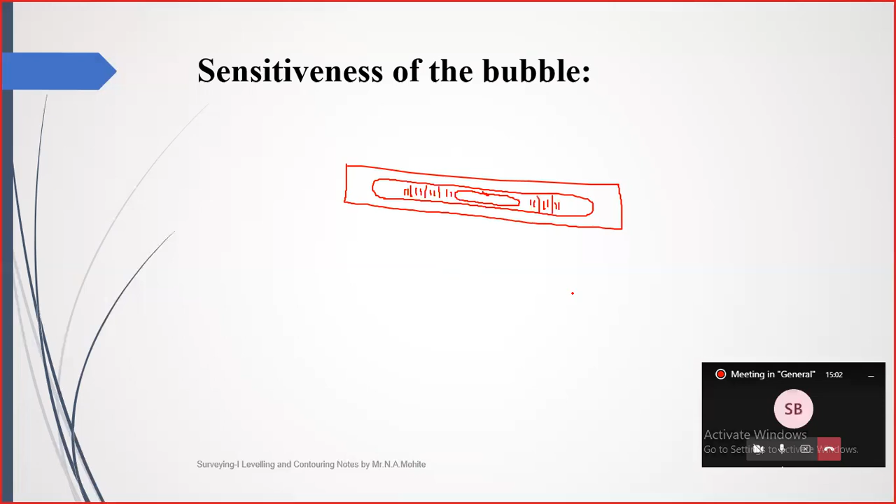So unless and until the bubble is at the center, we can't move further. But suppose there is a certain deviation, it is touching this one division, so there will be a change in the staff reading. So that is dealing with the sensitiveness of the bubble tube.

So in general, the concept of sensitiveness is related with the deviation of the bubble caused by the movement of this bubble per division. So you can call it the term sensitiveness in the context of a bubble. It is the effect caused by the deviation of the bubble per division of the graduation of the bubble tube.

So we are going to check correspondingly what is the change in the staff reading, and according to that we calculate a certain relation of this bubble tube, because the bubble is present inside this bubble tube in a curved manner. So this is the box which is fixed, this is the bottom part, and in which this is the bubble which is fixed.

So we are going to check whenever there is a change in the position of the bubble. So in general we can call the sensitiveness of bubble tube the effect caused by the deviation of the bubble per division of the graduation of the bubble tube.

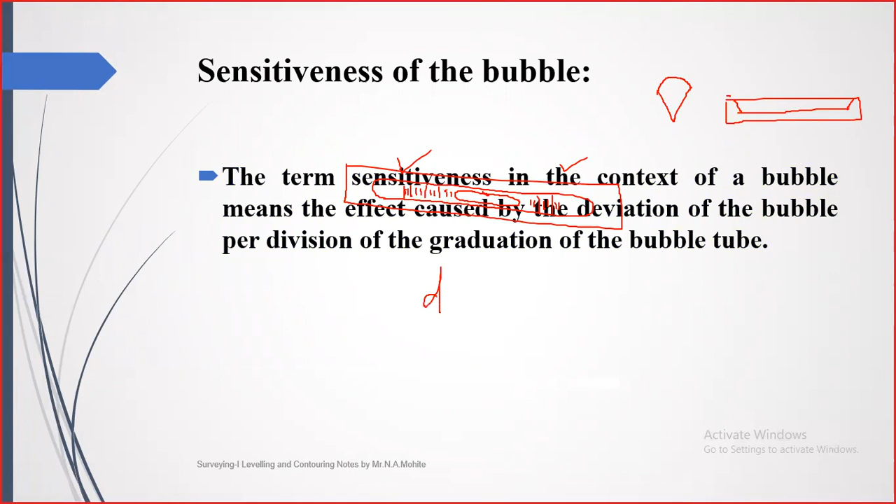N is nothing but the number of divisions by which the bubble has been moved. When it touches the first division, N is equal to 1. When it touches the second, N is equal to 2. And small d is nothing but the distance between these two graduations, which is 2 mm. We'll get it clear when we solve the equation. This d is sometimes denoted as small l also, that is the length of one division of the bubble tube, which is 2 mm.

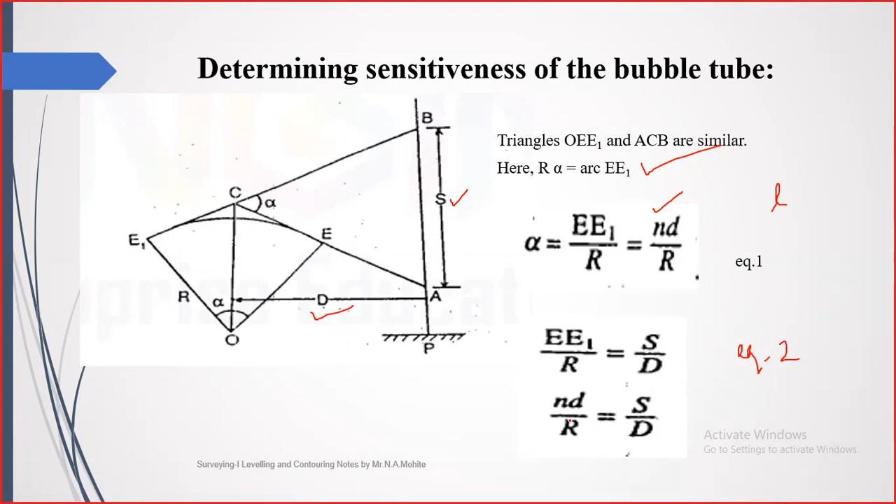Now I'm going to make the comparison. EE1 upon R is also equal to S upon D, by making use of the similar triangle property. So I'm going to equate equation number 1 and equation number 2, so that I can get the value of R, because the sensitiveness of the bubble tube is measured in terms of radius of curvature and angle of curvature, that is R and alpha. If I want the equation in terms of R, I transfer R to the right hand side, S to the bottom and D to the top.

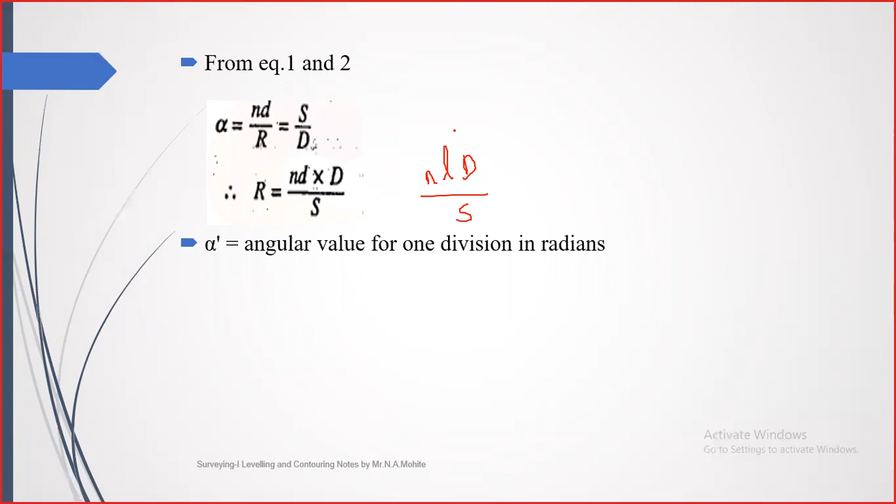So from equations 1 and 2, the equation becomes R = NdD upon S, or it might also be NlD upon S. And alpha is correspondingly transferred. Here R is the radius of curvature, measured in meters. N is the number of divisions by which the bubble has been moved. l is the length of one division, that is 2 mm, the distance between two divisions. D is the distance between the instrument and the staff, and S is the staff intercept. It can be written in this manner also.

This is the equation for R, the radius of curvature, but we are also interested in finding the alpha value, the angle of curvature. Correspondingly, we have the equation Nd upon R equals S upon D. So we equate it: S upon D into 1 upon N. We want the angle of curvature when the bubble is moved by one division, so we divide by N. This value comes out in radians.

If we want it in seconds, it is multiplied by 206265 seconds, since 1 radian corresponds to 206265 seconds. So this is the equation for the angle of curvature: alpha dash equals S upon ND into 206265 seconds, and this is the equation for the radius of curvature: R equals NlD upon S or NdD upon S.

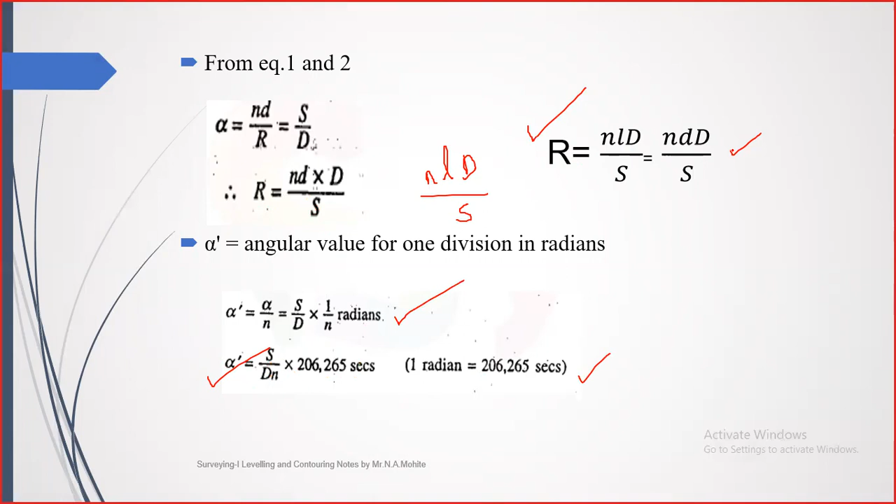Now take an example: I am standing with my instrument, the dumpy level, at position O, and this is point P at a distance of 30 meters. I am going to bisect the staff when the bubble is at the center, and take the staff readings when the bubble is moved by one division, two divisions, three divisions. That is the practical we are going to conduct, so we'll get it clear.

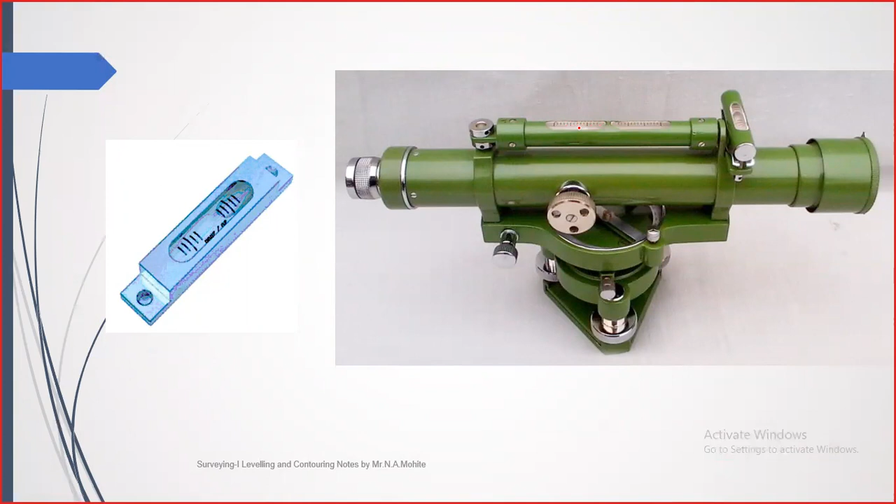This is the sketch of the longitudinal bubble tube. These are the graduations, you can see them here, and this is the bubble inside, mounted over the dumpy level. Likewise here you can see the bubble tube in an actual photo; this is a pictorial image. The graduations are there and the bubble is present here. We are going to determine the sensitiveness of the bubble tube according to that.

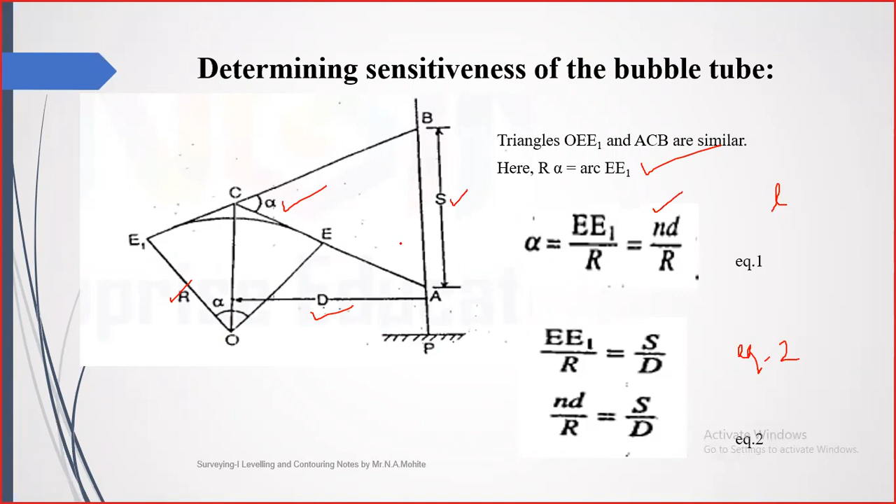So O is the instrument station, P is the staff station, distance is 30 meter. When the bubble is at the center, we are going to take that staff reading and enter it here. Then, as I told you, we are going to move the bubble by single division. When the bubble has been moved by one division, I'm going to write down that reading here. Then when the bubble has been moved by two divisions total, I'm going to write it here.

And when it is moved by three divisions in total, that is, in addition to the first two divisions one more, I'm going to write down the staff reading in this third row. The difference between the staff reading when the bubble was at the center and the staff reading when the bubble was moved by n divisions, I'm going to calculate and write here. That will be S1, the staff intercept S.

Correspondingly, the difference between when the bubble is at the center and when the bubble has been moved by n divisions, n equal to 2, whatever the difference is, I'm going to write it here. That is nothing but S2. And likewise for the S3 staff intercept.

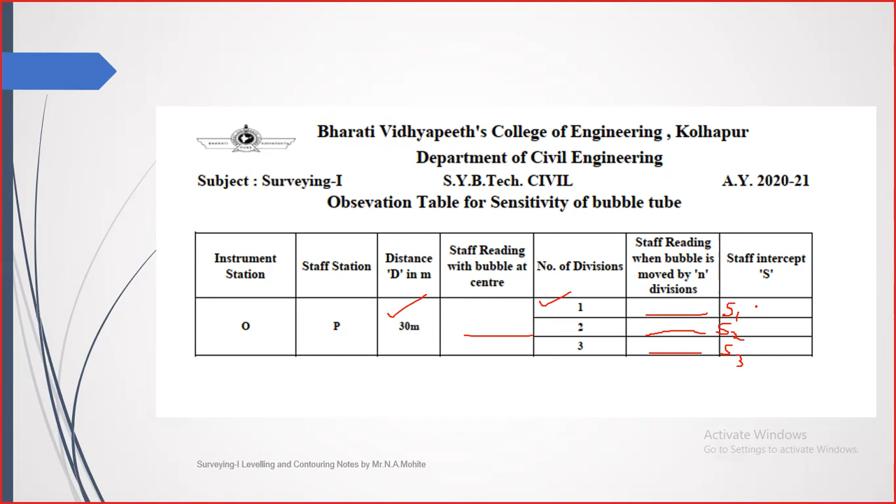So now, as per the formula, you have the distance D, n, and the staff intercept. You are just going to calculate three values of radius of curvature, R1, R2, R3, and angle of curvature alpha 1, alpha 2, and alpha 3. Then you calculate the average, which gives the radius of curvature and angle of curvature, that is nothing but the sensitivity of the bubble tube.

I will show you how the movement of the bubble is taken. When the bubble is at the center, I am going to take down the reading. This is the first case. Initially it was at the center, so I'm going to move it by one division and touch the first division. That is n equal to 1. Likewise I'm going to move it.

So what does n equal to 2 mean? It is going to touch this division, this graduation on the bubble tube. So this is n equal to 1, this is n equal to 2. The bubble has been moved by 2, in addition to the first only 1 more, so total 2 divisions. And lastly, I am going to move it by one more division, that is 3.

So when the bubble is at the center, I am going to bisect the staff and take the staff reading. Again, when it has been moved by one division, with the staff at the same position P, I am going to bisect the staff and note down the reading, and again for n equal to 2 and n equal to 3. After moving the bubble by 1, 2, and 3 divisions, note down the readings and enter them in the observation table.

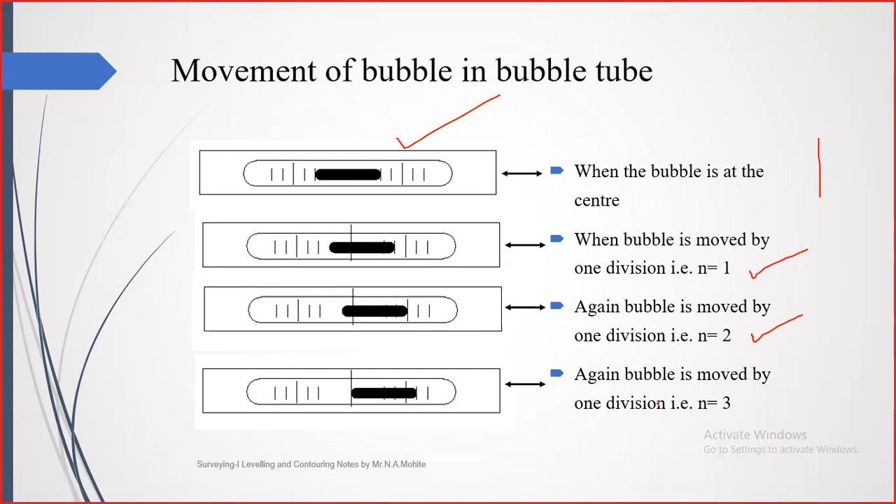After taking the readings, these are the readings I have done. To get the concept clear: when the bubble was at the center, the staff reading was 1.28. When the bubble was moved by one division, the reading on the staff was 1.29. When the bubble was moved by two divisions, the staff reading was 1.315. When the bubble was moved by three divisions, the staff reading was 1.345.

The difference between the staff reading when the bubble was moved by one division and when the bubble was at the center, that is S1, comes out to be 0.01. Similarly, 1.315 minus 1.28, that is the bubble moved by n equal to 2 divisions minus the bubble at the center.

So I am getting the value of staff intercept S2 as 0.035, and when the bubble was moved by 3 divisions, 1.345 was the staff reading I am getting, and when the bubble was at the center, the staff reading was 1.28. That difference, when calculated, I am getting as 0.065. So I'm going to enter it in the observation table.

Okay, so after doing this, we know that the formula for calculating the radius of curvature is R = nLD/S, and angle of curvature alpha is equal to S/nD into 206,265. The length of one division is the distance between two graduations. Here you can see clearly, the distance between two graduations is 2 mm, which is taken as the value of L.

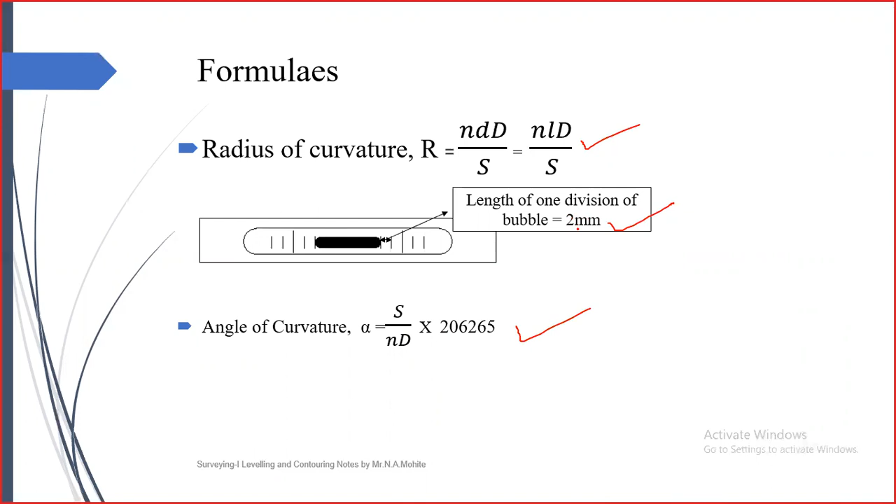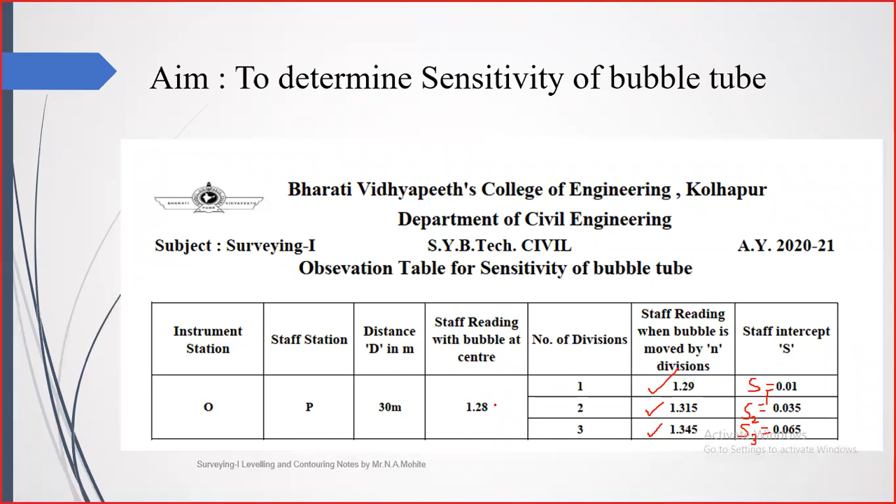All the values will be in terms of meters, so we convert this mm into meters. It will be 0.002 meter, or 2 into 10 to the power minus 3 meter, used for the calculation. So case 1, when n is equal to 1: the staff reading was 1.29 with the bubble moved by 1 division, the staff reading at the center was 1.28, and the calculated staff intercept S1 is 0.01.

So that is 0.01 meter. According to that, I have used the formula R = nLD/S, so R1 is equal to n1 upon S1 into LD. 1 is the number of divisions by which the bubble has moved, 2 into 10 to the power minus 3 is the length of one division, 30 meter is the distance between the instrument and the staff, and this is the S1 we have calculated. So R1 comes out to be 6 meters.

Similarly, I calculated alpha 1 using the formula S1 upon n1 into D, multiplied by 206265. So I am getting the value in seconds as 68.755 seconds. Likewise, I do the calculations for n equal to 2 and n equal to 3. For n equal to 2, the staff reading was 1.315; when the bubble was at the center, the staff reading was 1.280. So the staff intercept difference is 0.035.

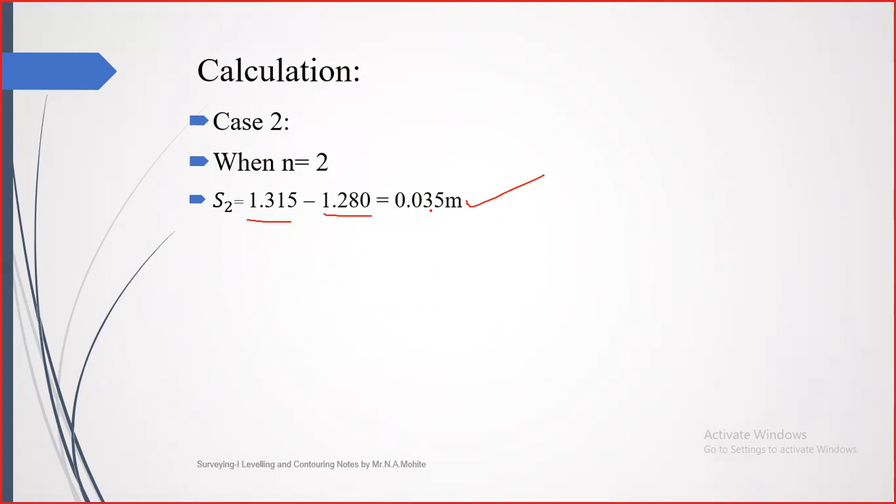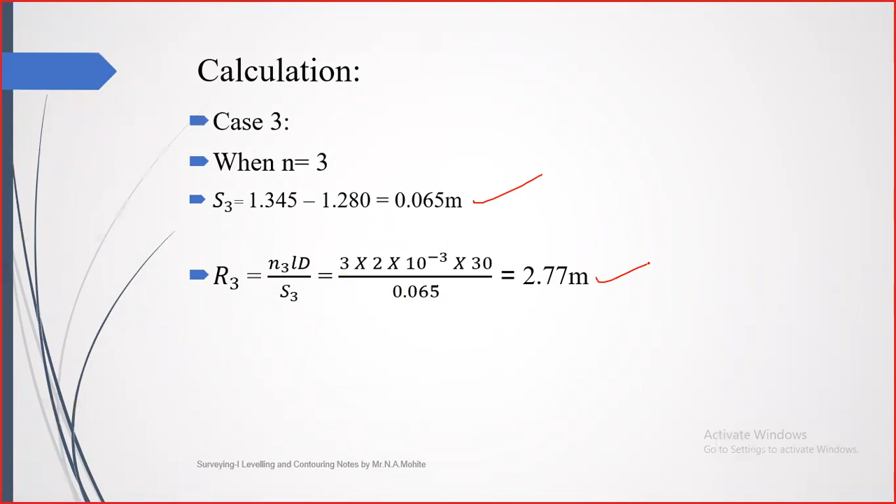Then again calculate R2 using the formula nLD/S, with n equal to 2 and the staff intercept we calculated. Just substitute and calculate R2, and correspondingly alpha 2, again multiplied by 206265, gives me 120.32 seconds. Similarly case 3 is calculated: S3 is equal to 1.345 minus 1.280, which is 0.065 meter, and R3 and alpha 3 are calculated.

Now we calculate the average, because we have 3 values for 3 movements of the bubble. The sensitivity of the bubble tube is expressed in terms of radius of curvature and angle of curvature, so for that purpose we calculate the average. R1, R2 and R3 were 6, 3.43 and 2.77. We add them, divide by 3, and get R average.

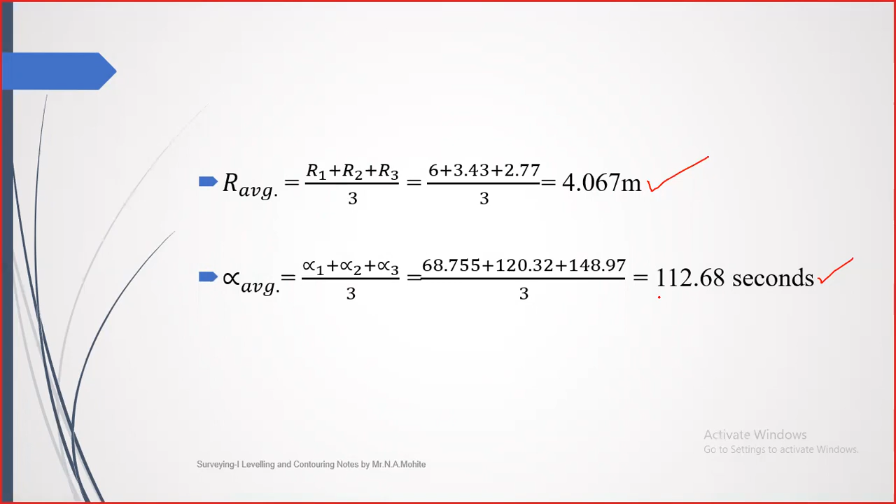Similarly, we calculate the alpha average, the angle of curvature: alpha 1 plus alpha 2 plus alpha 3 divided by 3, that is 68.755 plus 120.32 plus 148.97 divided by 3, which comes out to be 112.68 seconds. So the conclusion: the sensitivity of the bubble tube is expressed in terms of radius of curvature R equal to 4.067 meters and angle of curvature alpha equal to 112.68 seconds.

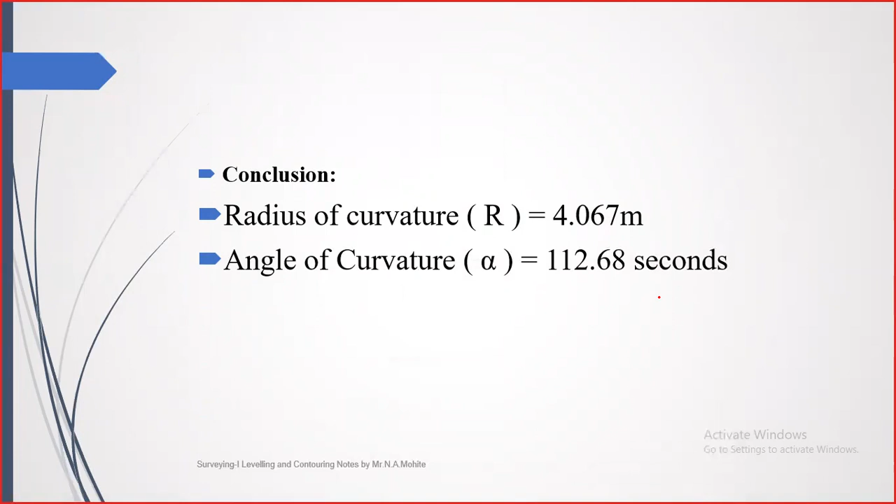So this was regarding the calculation part and the theoretical part: how the practical is to be conducted, the theoretical background, how the values are entered in the observation table, and how to do the calculation and conclude the result. In the next lecture, we will move further with numericals based on corrections, that is correction due to curvature, curvature and refraction, and visible horizon.